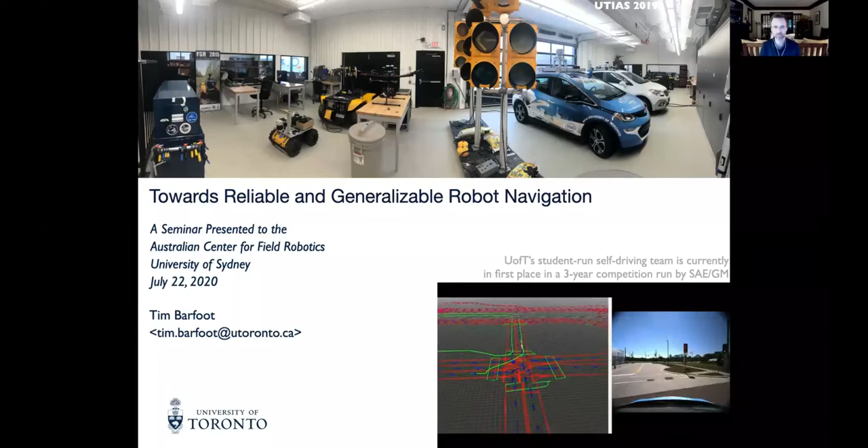Okay, so I'll jump right in. I won't talk about this video that's been on the first slide, but we do actually have an undergraduate self-driving car team. So this is all built by undergrads, and it's quite a fun project. So today I broke the talk into two parts. I'm going to spend some time talking about some past projects where we've been trying to build up reliable robot navigation solutions that can operate in the real world. I'll talk about this ongoing affair we have with a framework that we call visual teach and repeat. And I'll do a bit more of a deep dive on one aspect of what we've been dealing with in the last few years, which is dealing with appearance change, if you're navigating with cameras.

And in the second part of the talk, I will give you a bit more about what's going on at the bleeding edge of our lab in terms of some current projects. And this is where I'll start to talk about this push towards generalizable autonomy and the idea of a template for a navigation solution. And in particular, how can we build templates without expensive ground truth labeling for a lot of the data that we need to build up robot navigation solutions. Okay, so let's go into the first part of the talk.

And I'll just give you one slide on what I'm interested in, a nice overview of my interests. I've worked in state estimation, which I think of as perception, mapping, localization, tracking, as well as planning and control. And the size of these circles, I guess, is figurative for how much time I've spent on these different topics. A few highlights from the lab over the years. In planning, if you're a planning person, you may have heard of the Informed RRT* or the BIT* algorithms, which take RRT* and try to make it more efficient, in particular efficient enough to work in high dimensions, so freely downloadable code for those. We've also worked on some SLAM type problems.

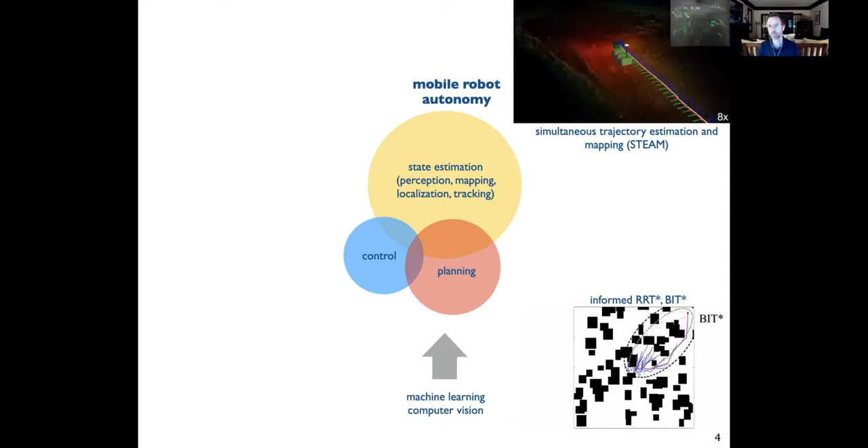In particular, we extended SLAM to a framework that we call STEAM, which goes from discrete robot poses to continuous functions of time for robot trajectories. And these tools can be quite useful in problems where you've got a sweeping while moving sensor. So for example, a lidar or a radar or a rolling shutter camera, where you can't really say that every datum from one of these sensors comes from the same robot pose.

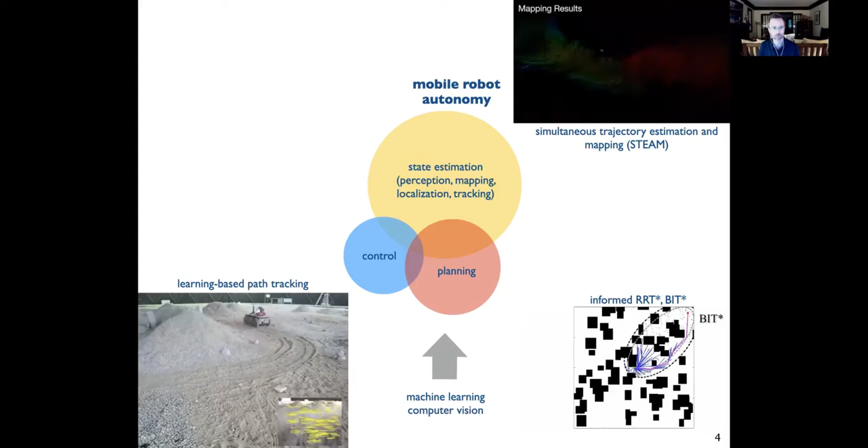We've done some work on control, in particular, combining learning with control. So we're seeing an example here of a robot that's trying to track a path, and it's trying to build a better model of itself by looking at its own path tracking errors as it repeats the same path over and over. And the idea is as it gets a better model of itself, it can actually try to drive the path faster and faster and more accurately.

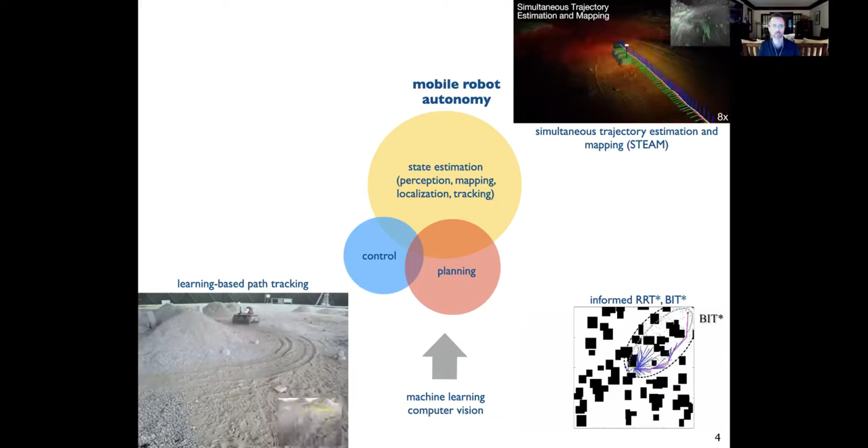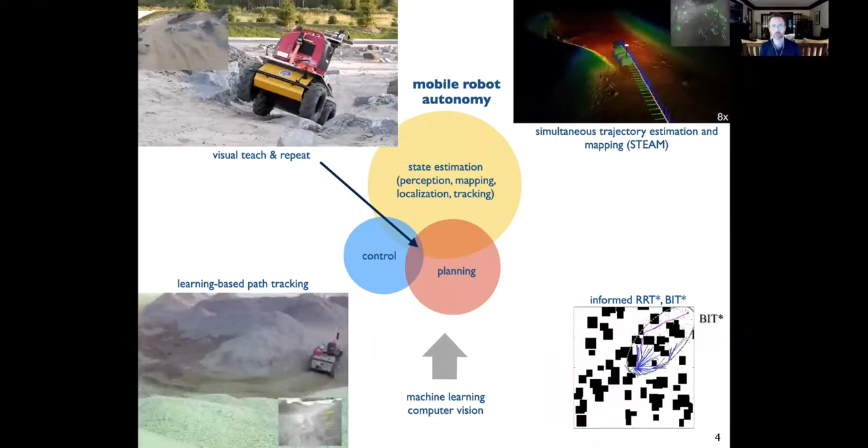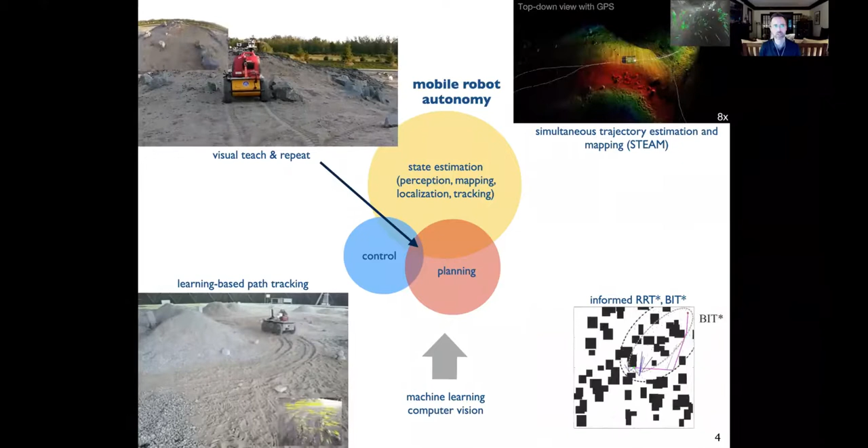And then what we'll mostly talk about today is one of the frameworks we've worked on to try to integrate all of these different component modules into an overall navigation solution, in particular this one that we call Visual Teach and Repeat. So I won't describe it because I've got a whole next slide that's going to talk about that, but I kind of think of that as not just a useful tool in and of itself for robot autonomy, but it's also kind of like a good petri dish for exploring different component algorithms, because we can plug them into this framework and see how they fare as part of a larger autonomy system.

Okay, so what is this Visual Teach and Repeat that I've mentioned a few times? So as I said, it's a full robot navigation framework that basically allows a robot to navigate, in this case, using only vision in any environment. So we don't assume any particular structure, like a self-driving car in terms of roads with traffic signs and lanes and these kinds of things. VT&R works with one laptop, one camera, a stereo camera, one training example of each path. So we actually get a human to drive the robot along each path that it's going to be repeating once as a training example. We don't use any GPS, we don't use IMUs, no DNNs, no global map, and no semantics. So it's very bare bones.

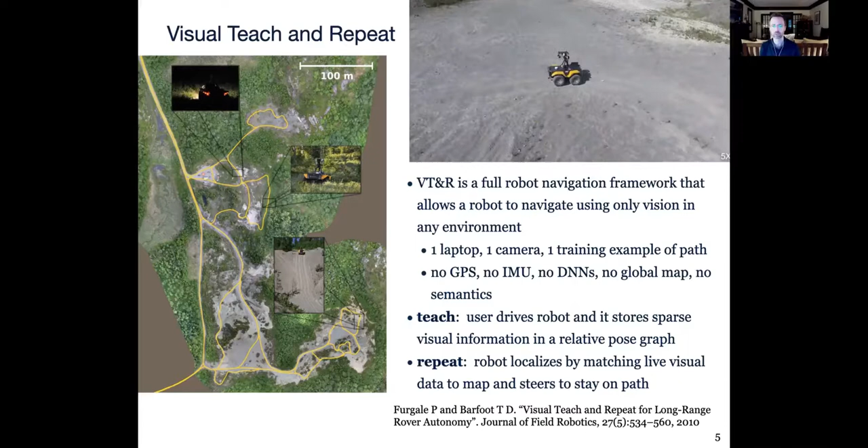And the general idea is that, as I said, a user will take a robot and drive it along a path, which we will build a map from a rich sensor, such as a camera, along this path. And we'll use this to then allow the robot to localize itself against that path to drive the path autonomously. And so you can see an example on the left side of the slide. I think you can see my mouse if I move it around. All of these yellow paths were demonstrated to the robot. In fact, this is an interconnected network of paths, 5 kilometers of paths that were taught to the robot. So one training example of each segment.

And then the idea would be to quickly show the robot all the places that it's able to drive and then have it autonomously drive on that network of paths essentially forever. That's sort of the overall goal. And you can imagine there are a lot of challenges around that. If you want to try to do it using vision, we can see even in the picture some examples of quite different lighting conditions that the robot might encounter. And it's only had the one training example of each path. So that's kind of what we've been working on for about 10 years.

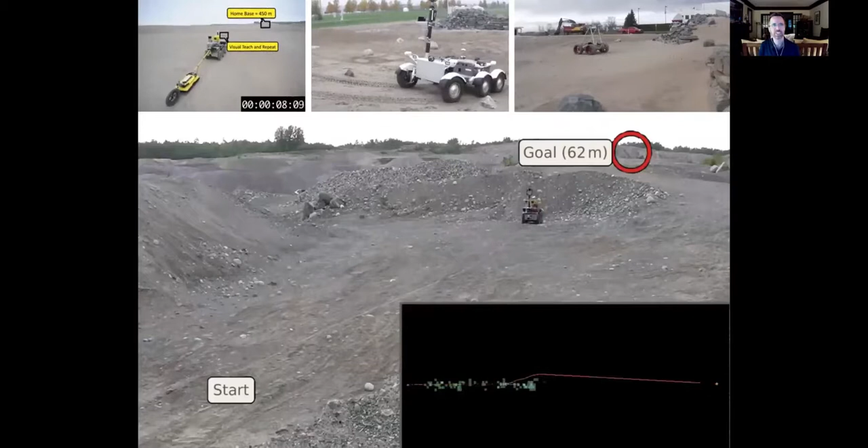Here are some older examples of VT&R in its infancy, I would say. On the top left, we've got a robot driving in a really barren environment using stereo up in the Arctic. In the middle, we've got some code that was deployed to a $11 million rover prototype at the Canadian Space Agency. Again, on the top right, another rover at the Canadian Space Agency that happened to be driving as Hurricane Sandy blew through. So it was sort of emulating a dust storm on Mars and changing the environment visually. And we were able to continue to drive.

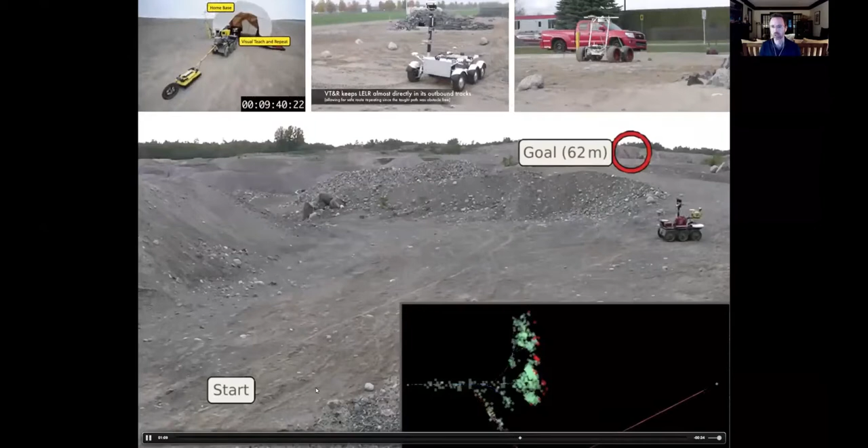And then in the bottom, we've got something a little bit more than teach and repeat. Here we've got a robot that's actually trying to teach itself a path from a start to a goal. And the idea is it's kind of like an embodiment of a tree search. So the robot is branching off this tree that it's building up, and every time it finds a dead end, it uses our visual teach and repeat algorithm to backtrack along the tree towards the root and then branches off at a different place.

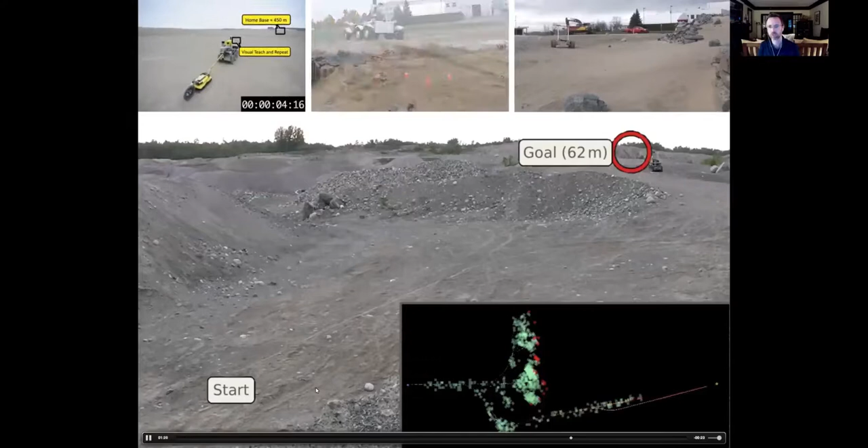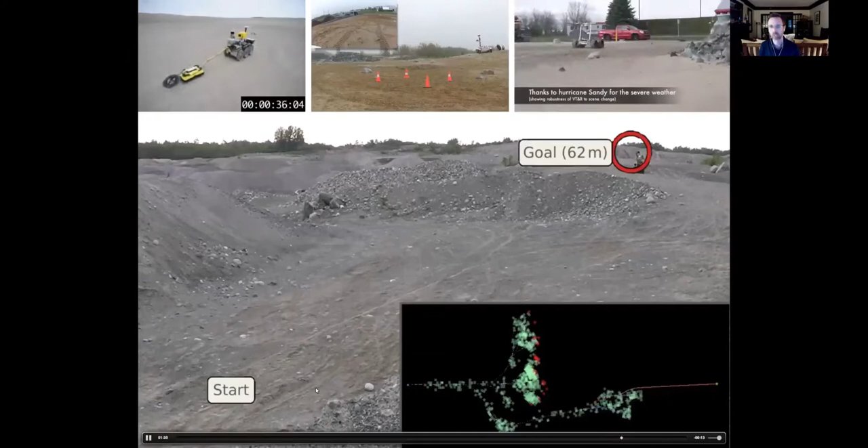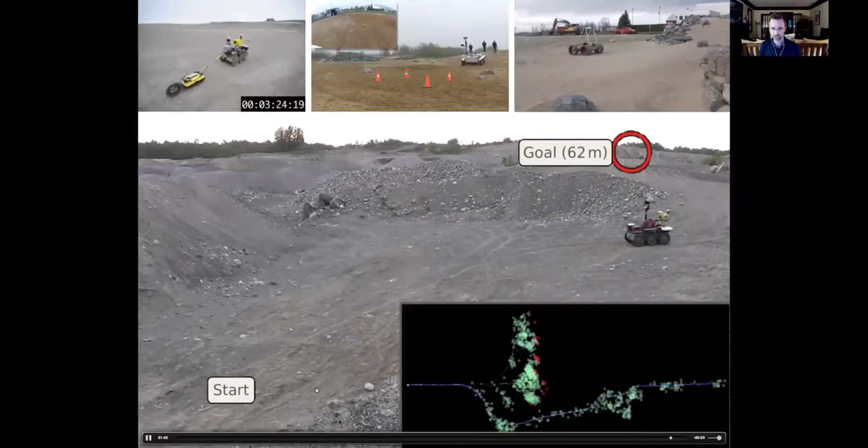And eventually it can discover a path from the start to the goal without knowing a map of this terrain in advance. And once it's established that, it can actually just autonomously drive back and forth between that start and that goal as many times as it likes. So there are some applications in planetary exploration that could make use of that.

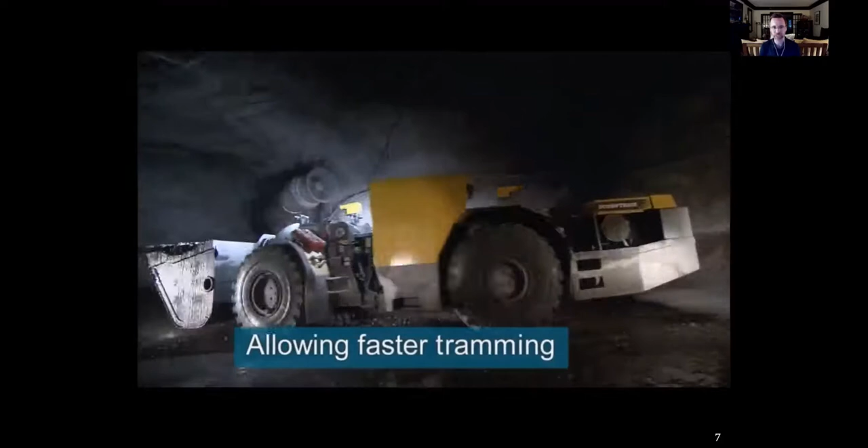We've also deployed a visual teach and repeat algorithm, actually even before all these vision videos that I just showed you, where we're using a lidar for an underground mine truck. I know a lot of the early underground mining started at U Sydney, so this is my shout out to all of that work that we built on.

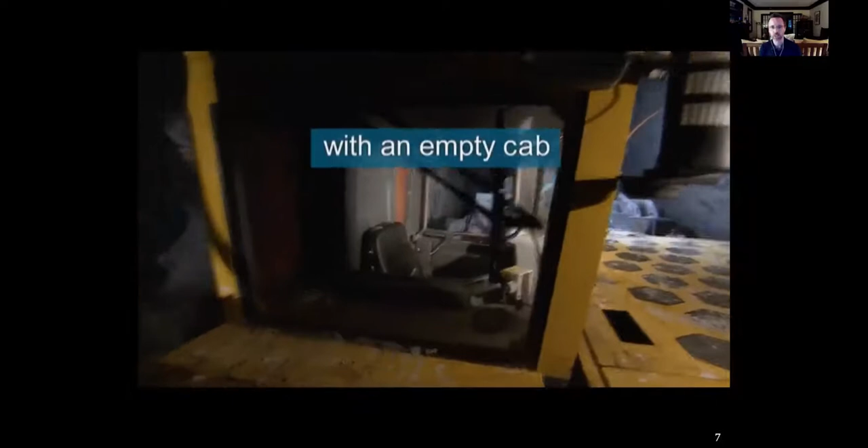This is a 14-ton scoop tram driving in a mine autonomously. There's nobody in the cab, and it's using this visual teach and repeat to navigate up and down the hallways. So again, an operator would show the robot the paths that it's allowed to drive, and then it can operate on those autonomously.

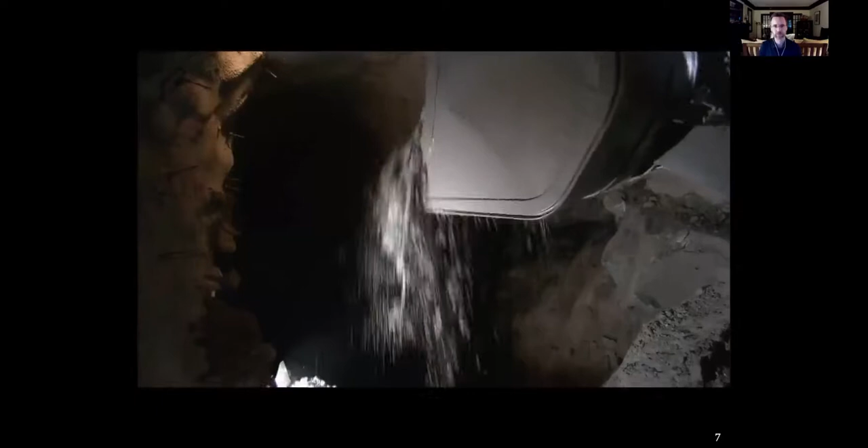More recently, we've been deploying this framework onto unmanned aerial vehicles. We're collaborating with a company that does delivery in the far north of Canada to remote Inuit communities. And the idea is that we would like a fallback if GPS were to fail.

So the idea is we're flying under GPS control, and eventually we might experience something like a GPS failure, but because we've built up a visual map on our outbound pass, we can then use that to localize and backtrack towards the start without using GPS. And so here you're starting to see some of the inner workings of the algorithm, some features that we're tracking, and we're using those to build maps.

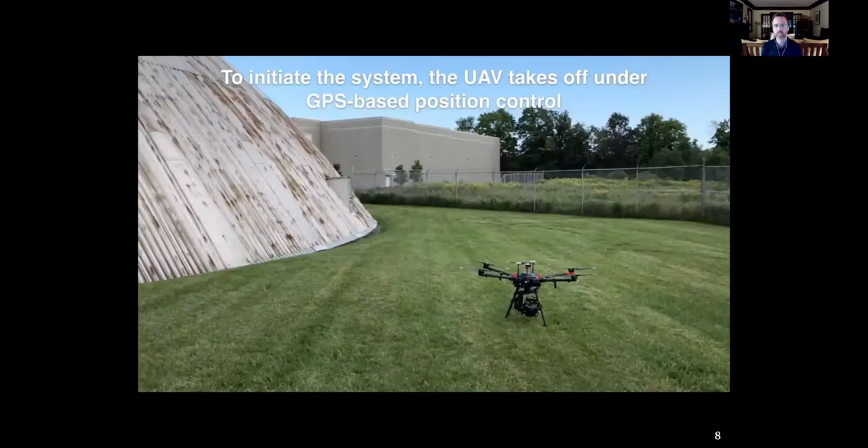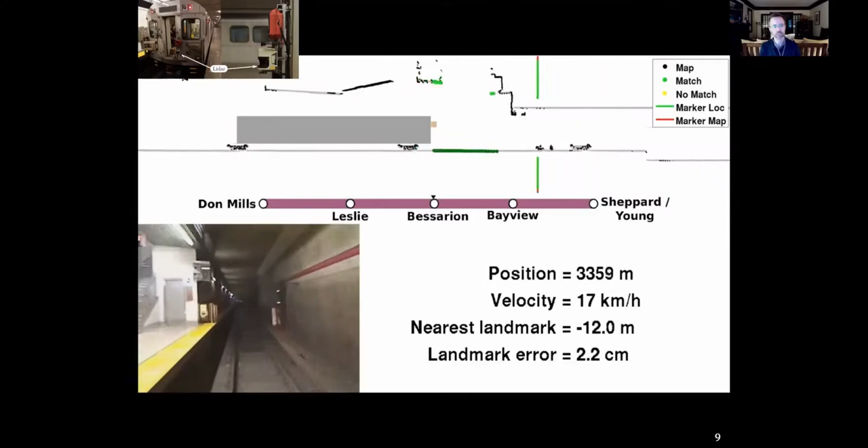And then one last example of where we've used some of the underlying localization technology of teach and repeat. We've actually been working with the local transit commission to see if we can improve on the positioning of transit trains in the Toronto transit network. So it turns out, I didn't know this, but most trains are actually positioned using RFID tags, which means the precision of the localization of the train is like between 10 and 100 meters, which is not particularly good.

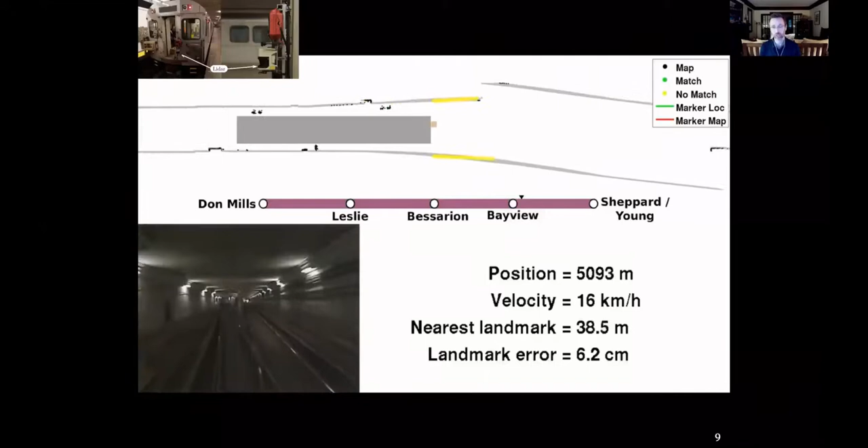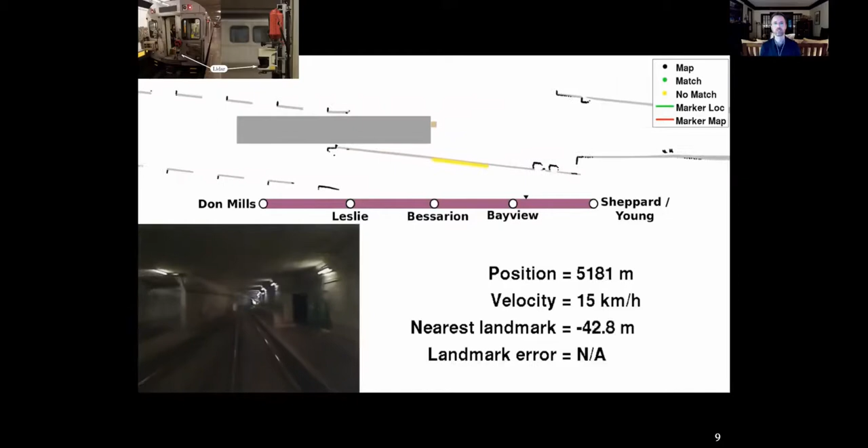And it turns out if you could actually have much more precise localization, you could pack more trains onto the same tracks because you can know where they are more precisely. In fact, if you could know where you are very precisely, to a few meters or 10 centimeters, you could put twice as many trains on the Toronto TTC tracks and thereby double the capacity without changing the tracks. So this is actually showing that we can localize using similar infrastructure that we would use in teach and repeat down to a handful of centimeters using just a planar SICK laser rangefinder.

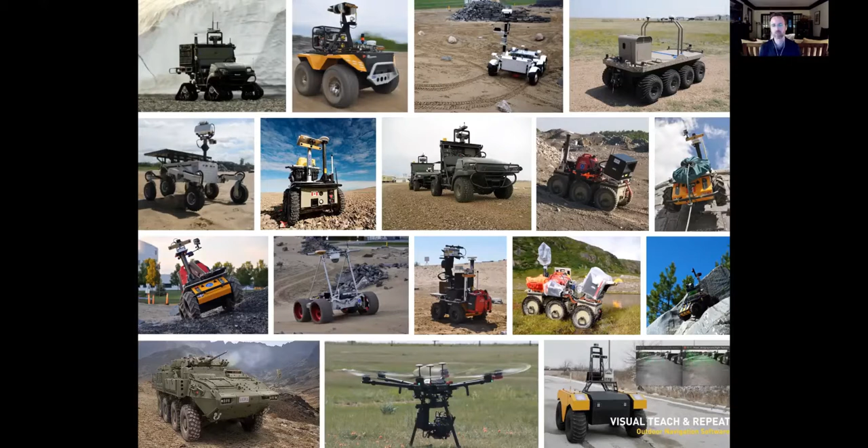So we've been working on this framework, visual teach and repeat, for, as I said, about 10 years. Deployed it on lots of different robots, had partners deploy our code on different robots, everything from these unmanned aerial vehicles to the tank-like vehicle that you see in the bottom left of the screen. Learned a lot about different things. And in particular, now we've robustified the code enough that in the bottom right, you can actually buy a license of our teach and repeat software from ClearPath Robotics. So they'll deliver you a robot with our visual teach and repeat software on it.

Hey, Tim, quick question from Viorella. She's asking whether the existence of a path that is wheel tracks is a requirement for this to work. Like, do we need to be able to see the tracks? We do not need to be able to see the tracks. We just need to have a textured environment where we can have some interesting landmarks to track.

Okay. I also just wanted to ask, with this single shot demonstration, are you then updating the model in subsequent repeats so that you're learning how this is changing through time? I think I've seen you show this in summer, winter. Presumably there's some learning that sits on top of all that. It's coming up. You're anticipating the talk. Sorry. It's coming up. Very soon I'll get to it, actually.

Okay, I'll keep going. So as I said, visual teach and repeat is a tool in and of itself, but it's also a bit of a petri dish for letting us try out different things. We've played with everything from learning to improve path tracking, I showed a video for that, learning to assess terrain, route planning through a network of paths under uncertainty.

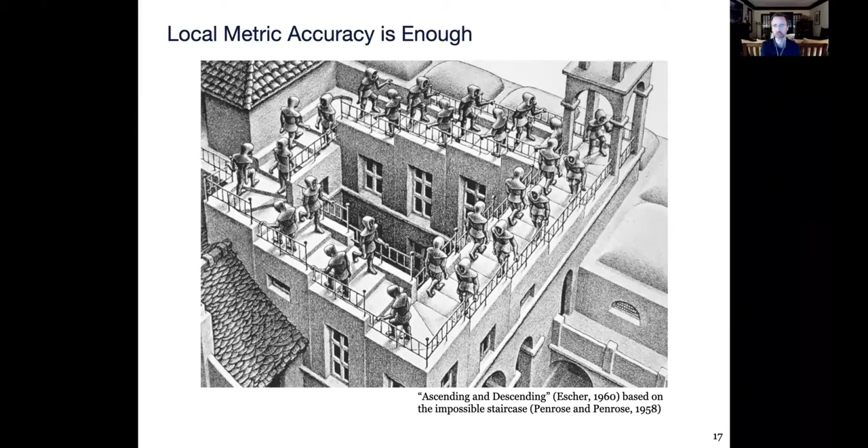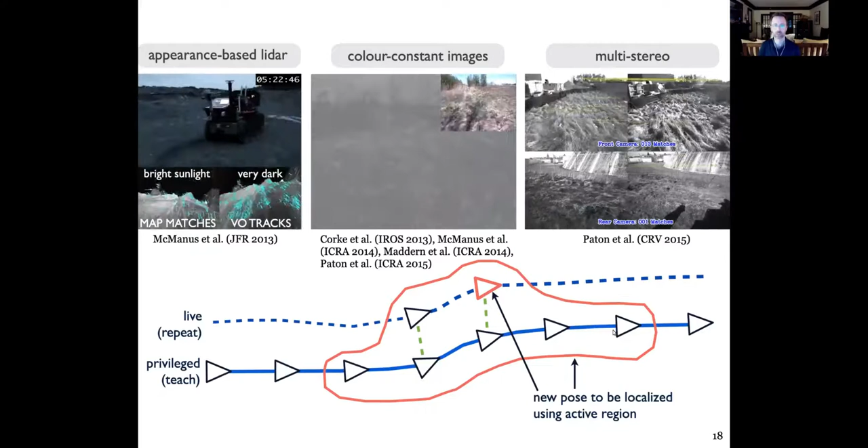So to start to deal with appearance change now that we know sort of how the map works, we tried a number of things in the past. So if we're always trying to localize the live image, this red triangle, back to the map, if we're only ever using this one map that was built under one particular lighting condition, for example, you're going to run into some problems as the light starts to change. And so we've tried a couple of things over the years that didn't work so well, I'm going to say.

So the first thing you could try to do is change the sensor, right? So we did a bunch of work where instead of using cameras, we were using this fancy lidar that could produce intensity images way back like 10 years ago. And then we tried just tracking features in these intensity images instead of in regular images. And those images kind of look the same whether you're in sunlight or dark. And that worked okay, but it required like a $100,000 lidar sensor. So that isn't really something that's a good long-term solution.

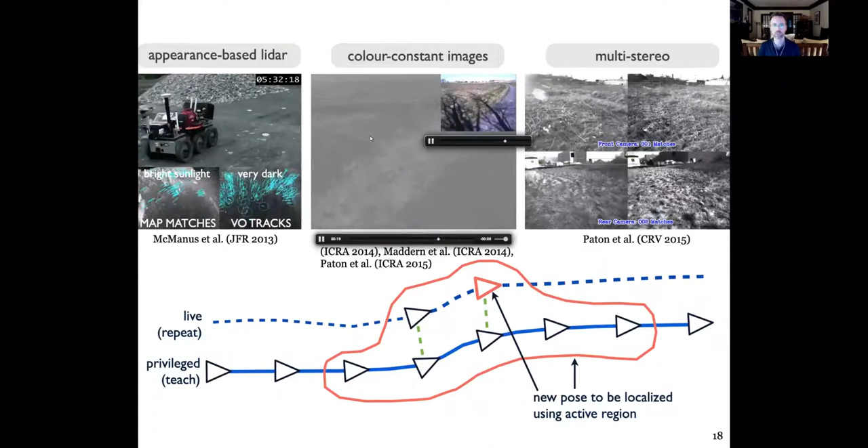We also played around with this idea of color constancy and taking these transforms on the red, green, and blue channels that image in different wavelengths and combining them to sort of eliminate shadows. So you can see here some shadows in the regular red, green, blue image, and then we've eliminated those in this color constant image that we can calculate. And it turns out that's actually pretty good. In daylight hours, that's a very cheap way of doing something that lets you continue to localize pretty much through all daylight hours, but not good enough to localize at night, for example.

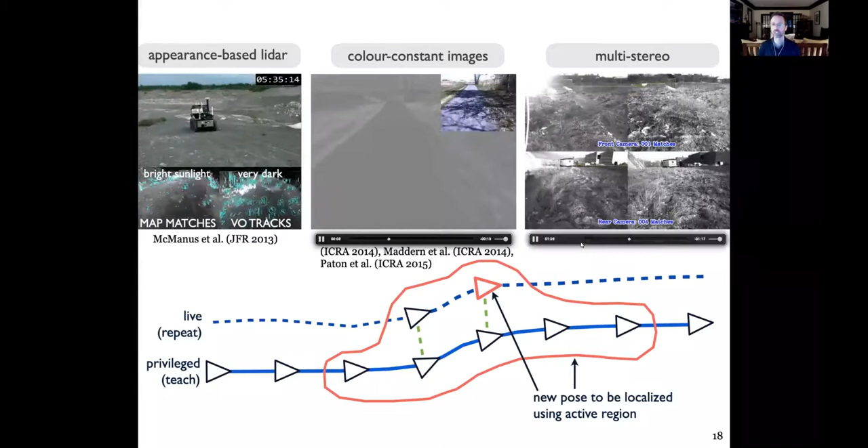Even dirty tricks like putting cameras pointing in different directions so that you can sort of guarantee that not all of your cameras are pointing at the sun. So I would say these are all interesting things that we tried, and they're all kind of band-aids on the problem. And really, none of these allows us to sort of teach a path in the sunlight and then track it in the dark unless you use a very expensive sensor.

Got to move to Australia, Tim. It'd be easier.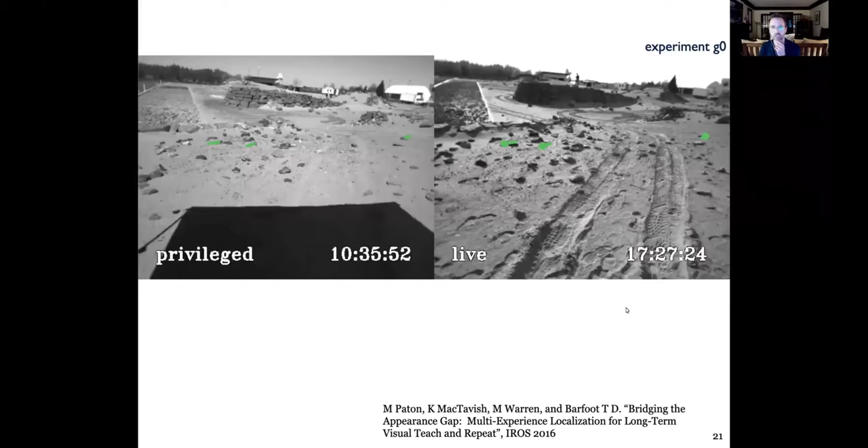The shadowing is quite different, and we're getting very few matches, indicated by these green blobs in the image, just SURF features between these. And as we start to drive around, we can see there's places where we actually get no matches. Sometimes we get matches, but quite often we're not getting any matches because the lighting has just changed too much.

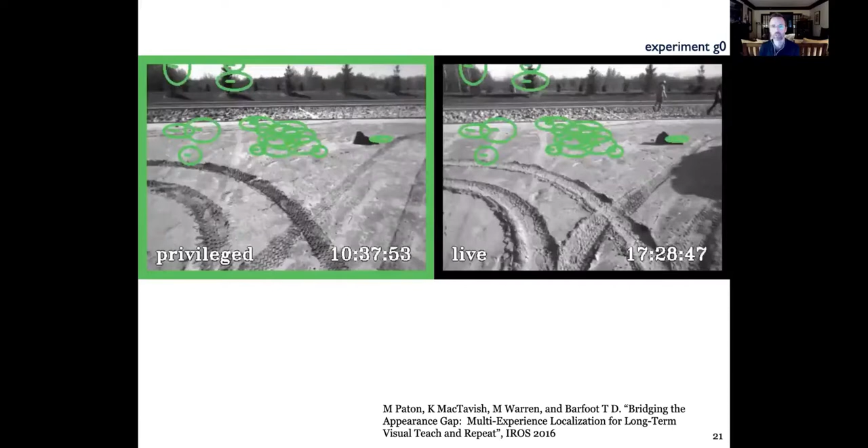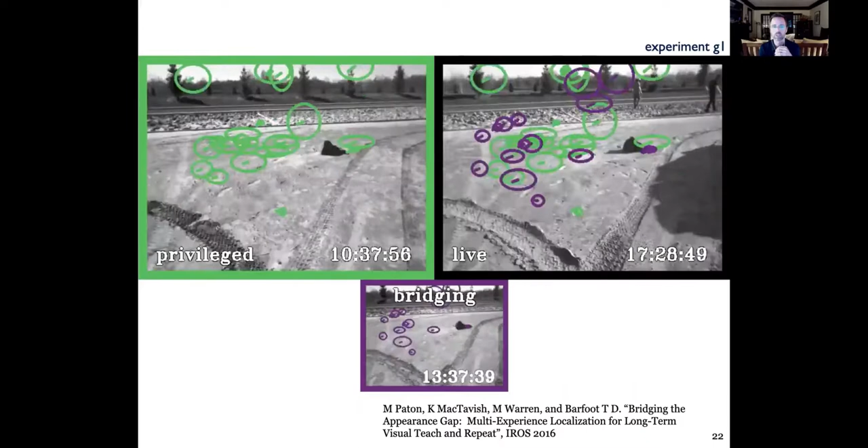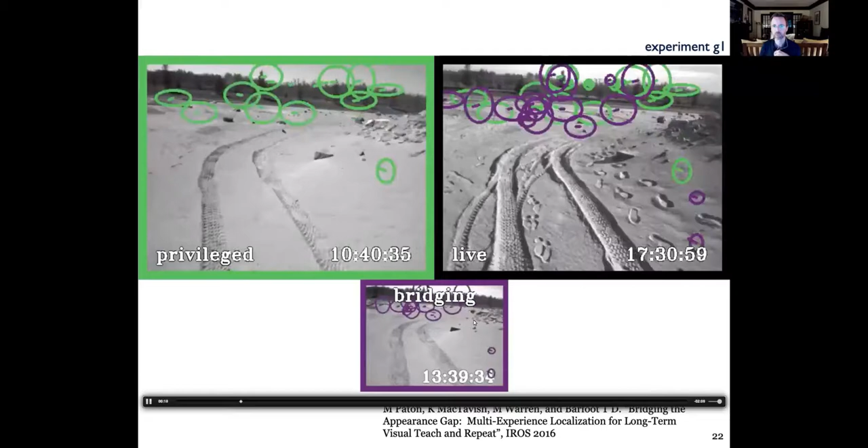And so the solution is maybe we could actually not wait 7 hours to drive. Maybe we could have an intermediate experience that's sort of halfway between these two in time, which is the one that I've added at the bottom. And so now I can match the live image, not just against the original image, but also through this, what we're calling bridging image, which is halfway in time. And we can see now that the different colors in the top right are features that we're matching back to each of these two different previous experiences of driving the path.

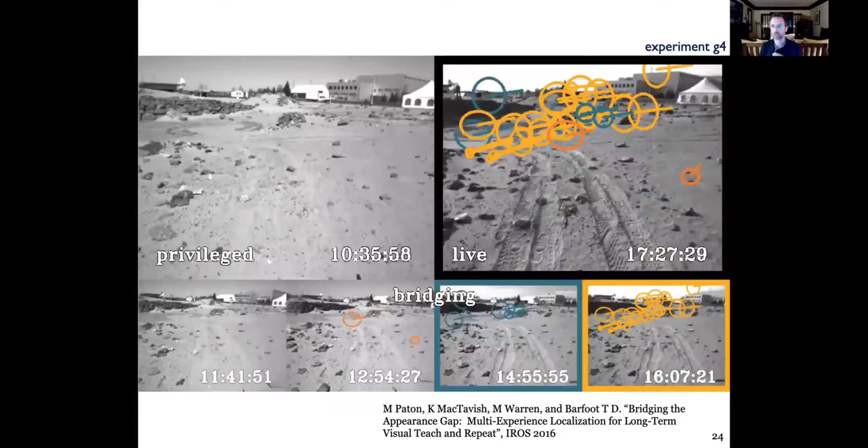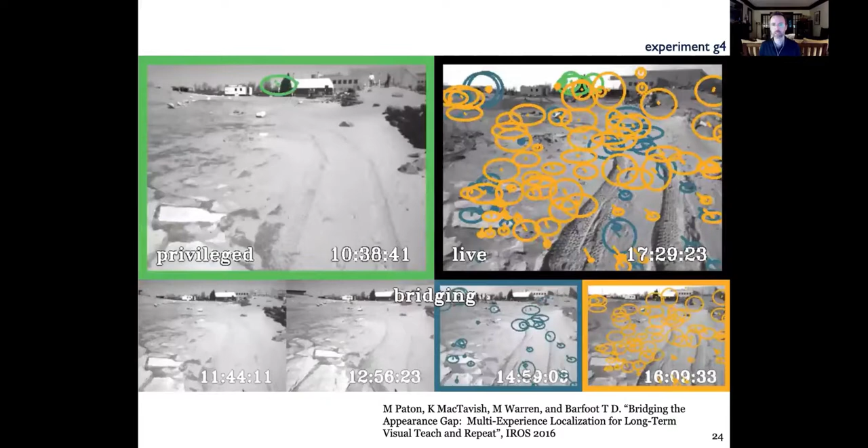And if one bridging experience is good, surely 2 would be better. And if 2 is good, 4 would be even better. And if 4 is good, 1,000 and whatever would be even better than that. And so the idea is every time the robot drives the path, it's getting a new visual experience of what that path looks like, and we can add that into our database, and then we can use every previous experience of driving the path to try to localize the robot. At least that's the idea.

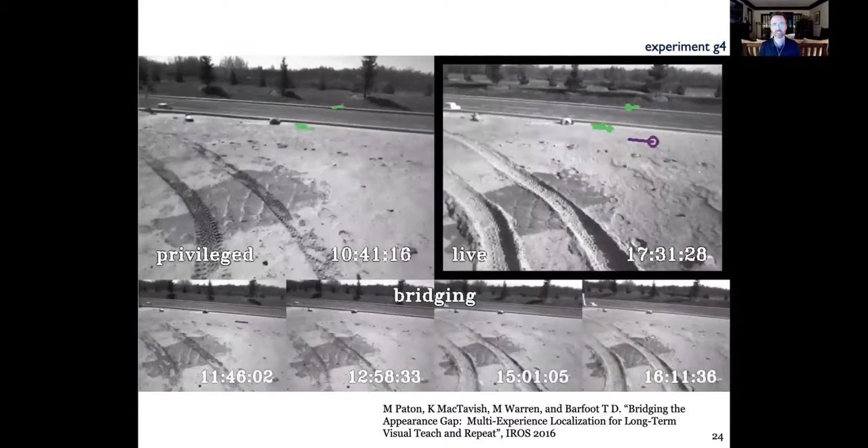Of course, if you're listening carefully, you'll realize that how on earth does this scale, right? We might be driving the same path thousands of times. Of course, we're gonna have to start pruning things off. And actually, even before pruning, we could just be selective in choosing which things we want to localize against.

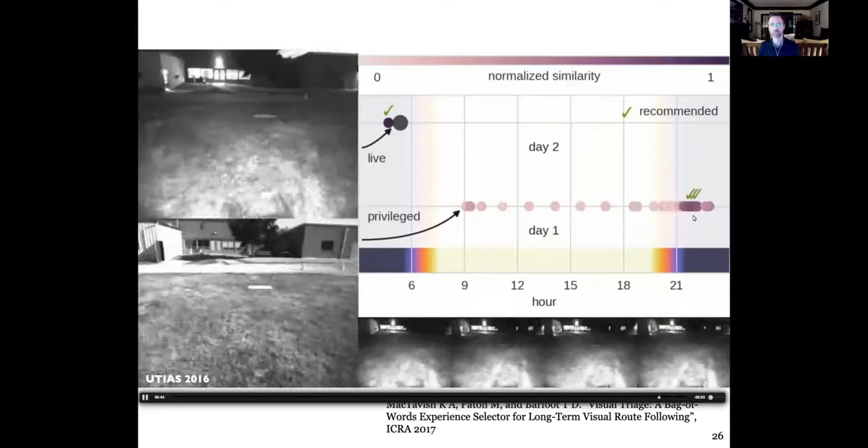So this is a video from a 24-hour experiment where we had about 30 or 40 traverses of the same path. And we actually built a sort of recommender system that would take the live image, and it just used something like Visual Bag of Words to quickly compare the live image back to the previous experiences that we'd stored at all different times of the day. And these little green check marks are the recommended experience. And then we just metrically localize against those rather than all of the previous experiences. So we're kind of triaging and just selecting a subset of the previous experiences to localize against.

And so that's sort of my summary of where we were a couple of years ago. If you put all of that together, you have a system that looks like this video. So this is a 2-week experiment we did in Sudbury, just about 4 hours north of where I live in Toronto. I actually showed you the map of this experiment at the beginning of the talk on the first slide for visual teach and repeat. The robot is now autonomously traversing some of these paths. So we actually did about 200 kilometers of autonomous driving on this 5-kilometer network over a 2-week period.

And you can see actually these ruts in the ground, those weren't there when we got there, right? Those are there because we've been repeating the same paths over and over so many times that it's literally etched itself into the earth. And you can kind of see the accuracy with which we're able to follow these paths. And I will say, the lighting and the weather changed significantly over that 2-week period. So we were doing experiments even in the dark with headlights.

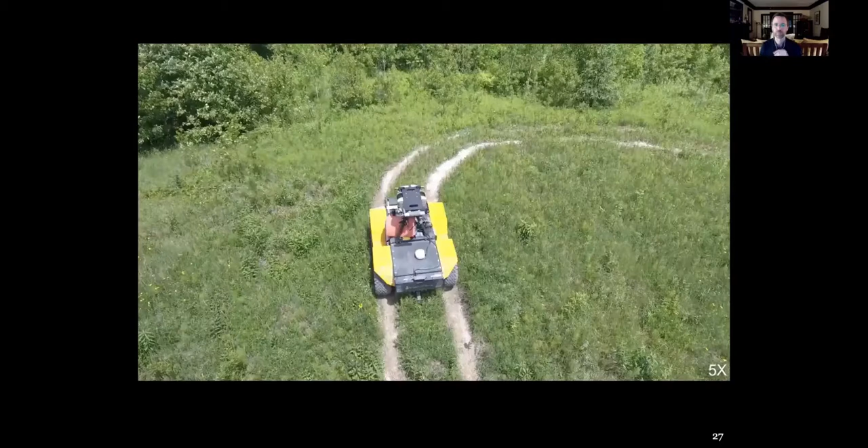The Achilles heel, of course, is you can't let the appearance change too much before you redrive. Otherwise, there's going to be a gap in what the robot is able to match against. But this is one solution to being able to sort of span all the ways that the world can look, as my friend Paul Newman often says. And really, that's probably good enough for at least medium-term autonomy.

Okay, so what have we been doing since this work? All the videos that I showed you up to this point were essentially working on SURF features for the landmarks. And of course, the technology has moved on in these past 10 years. One of the things we tried before trying deep learning was something called GRIEF. So you may have heard of BRIEF features, which instead of SURF, which is using a histogram of oriented gradients, BRIEF features use these little patches with these binary comparisons.

So this white patch in the middle is sort of a blown up version of one of these patches, and these little black lines are the binary comparisons that it does in the patch. So the descriptor for this patch is essentially saying whether one end of this binary comparison is brighter than the other end. And so BRIEF sort of randomly picks these binary comparison lines within a patch. And then what we looked at was an algorithm called GRIEF. So GRIEF is actually a learning-based version of this algorithm.

And the idea is you can kind of think of this collection of binary comparisons as like a population. And we run something like a genetic algorithm, a survival of the fittest algorithm, to sort of evolve this pattern of binary comparisons over time. And we get labels for free because we're localizing as we drive along. And so we can kind of say which binary comparisons are consistent with the matches that we're actually getting and which ones are not.

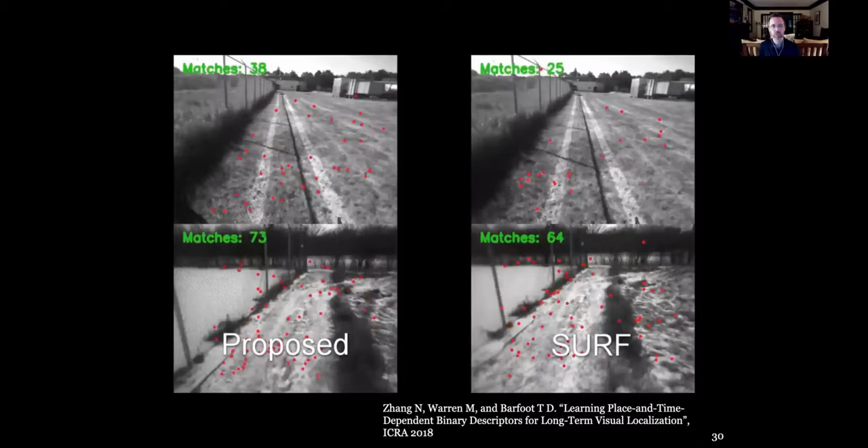Compared to SURF, we ended up getting, in sort of the corner cases, about 2 times as many usable matches, but it's still a bit of a band-aid. It's not going to allow us to match daytime to nighttime, for example. But it was something that was useful, and it was pretty low cost to implement it.

Another thing we've been looking at is getting away from features altogether and trying to use full image data. So this is an example from UAV navigation, where we were trying to directly match UAV images to rendered images from Google Earth. And this is a little bit of a similar problem to trying to match across large appearance change that we saw on the ground vehicle.

So in this case, we're actually using mutual information to try to align these images. That's been demonstrated in other contexts for even matching different sensing modalities. So we thought it would be a good thing for dealing with appearance change. And so we implemented, actually this is not running live on the UAV, but we implemented on data sets a new algorithm for localizing against these Google Earth rendered images.

So in this case, we don't even have to actually fly the flight path in order to get the teach pass. We can just do it virtually in Google Earth and then have the robot try to repeat that same path. And we kind of showed that we were able to robustly match across even quite different lighting conditions back to the same Google Earth rendered images, which is what's coming up in the video right now.

So here's an example, same place at different times of the day. These are images from the UAV, and we can see the shadowing is quite different, which presents quite a bit of a challenge. And so now we're localizing all those different lighting conditions back to the same Google Earth imagery and trying to show that we can match ground truth, which we gathered with a GPS INS system. You can kind of see just qualitatively that across all these different lighting conditions, our localization remains pretty robust.

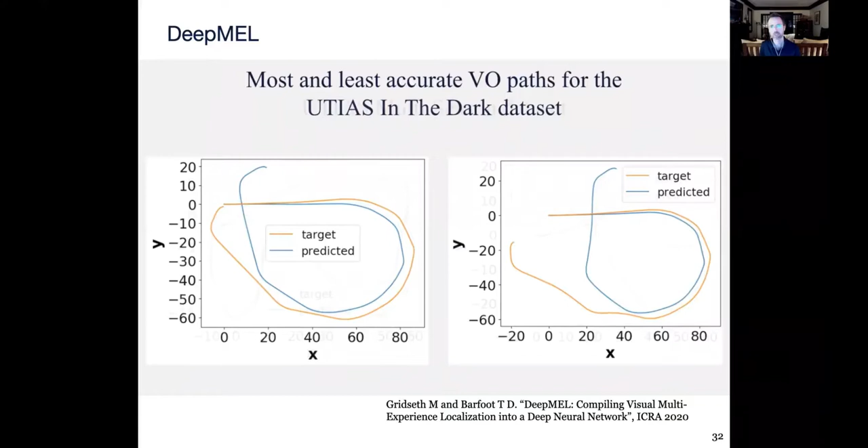And I'll just show you some examples of that. So we trained two different networks to do VO and to do localization. And we're kind of seeing here the results for VO, which is sort of like not even state of the art, but good enough for teach and repeat. And now there's going to be a video that shows sort of the results of trying to localize directly with this deep neural network. So this is at test time.

We've got the teach image in the middle column and the repeat image on the left column. So matching snow to grass or green grass to brown grass. And on the right, we're sort of seeing an alpha blend of those two at the estimated pose coming into the network. And we can kind of see when these images line up well through the two images that are being blended, it means our localization is working well. And when it looks kind of weird, it means our localization is a bit off.

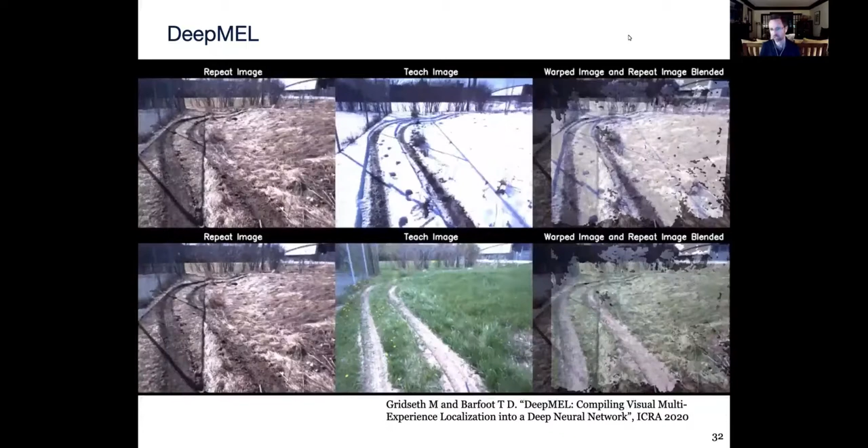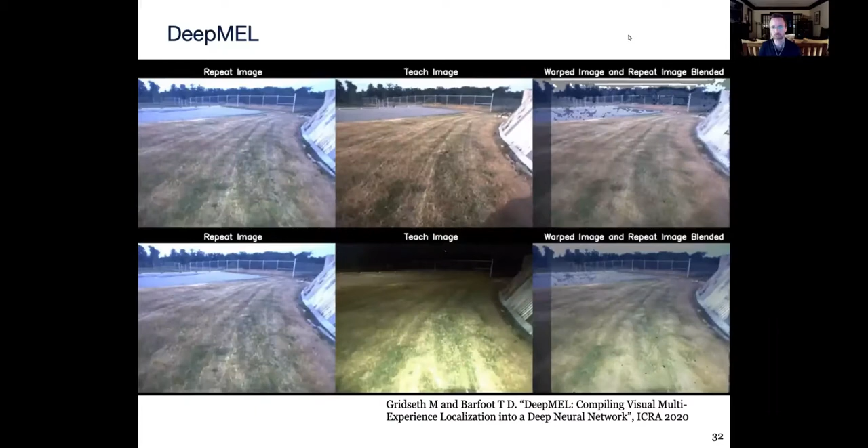We're not quite in the ballpark of localization being good enough to actually run this live on the robot, but we're close enough that I think that the idea has promise. Probably we need some more training data. The challenge here is that while we're able to do this reasonably well on the same path that we localized on, we cannot take that network so far and then use it to localize on a totally different path. And so this is just a way of compiling all of the existing experiences into a network for that particular path that we're going to drive, but it doesn't yet generalize.

Okay, how am I doing on time? Really good, Tim. We've got another, well, it's 10:36, so you've got until the hour. So please do take your time and run through it. If we run over a few minutes, it's not the end of the world. Sounds good. Okay, just wanted to do a time check.

So that's sort of like a good summary of a bunch of stuff that we've done over the last 10 years and even just the last couple of years. And now I want to talk about some of our bleeding edge current projects. So what I'm really getting interested in these days is this idea of, all these systems that I've shown you are, many graduate students working on these for many months or sometimes years to get to the level of robustness that we really want to see. And that's a lot of effort.

And so what I've been interested in lately is, could we start to build more of a generalizable solution where we could just build a template for something like a teach and repeat algorithm and then drive the robot around, get a bunch of input-output data, and then fill in the details of that template and see how that goes. So I'm going to talk a little bit about that now.

And I guess my philosophical slide of the talk is that this is my state of affairs for robotics, I would say. There's some trade-off between the difficulty of the task that we're trying to solve and the generality of the solution. And of course, we would all like to be here where this green circle is. And I think a lot of the time, at least in field robotics, we sort of compromise and head more along this direction where we want to solve the hard problem, but we often overfit to that

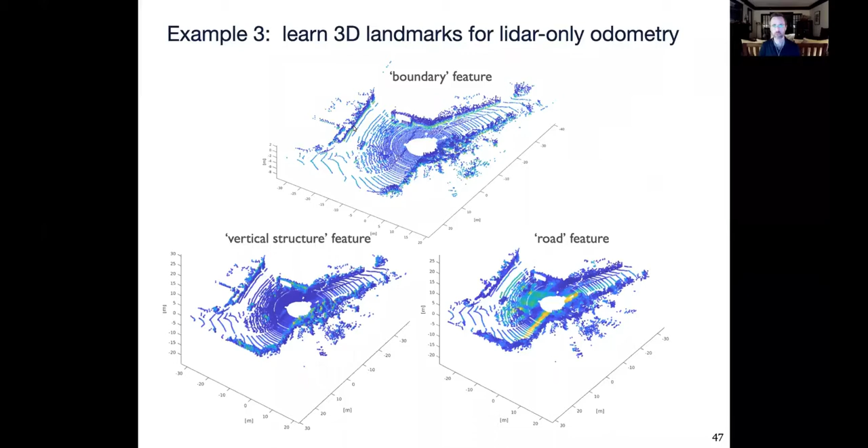Okay, so I think that was actually my last slide. I'll just put this video up to sort of show what we'd hope to be able to do. That's as far as we've got on this generalizable problem. Eventually, what we hope to be able to do is just drive around and then output an algorithm that does something as robust as this without having to spend 2 years of engineering all of the software and testing it for so long. So not there yet, but that's sort of where we're going.

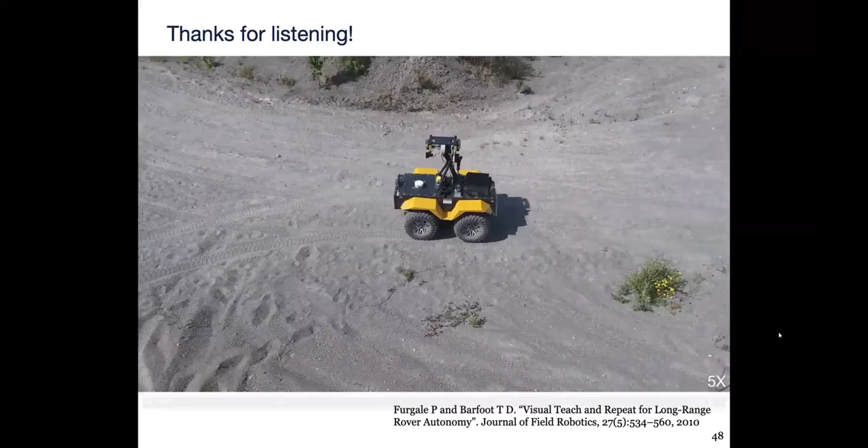When you were talking about the additional views when you're running multiple tracks, have you done any work on sim-to-real, synthesizing additional tracks? Can you hallucinate what things look like under different conditions, modeling lighting changes and things like that, and use that to provide additional simulated views of what the robot thinks it should look like, that it could check against if it was repeating?

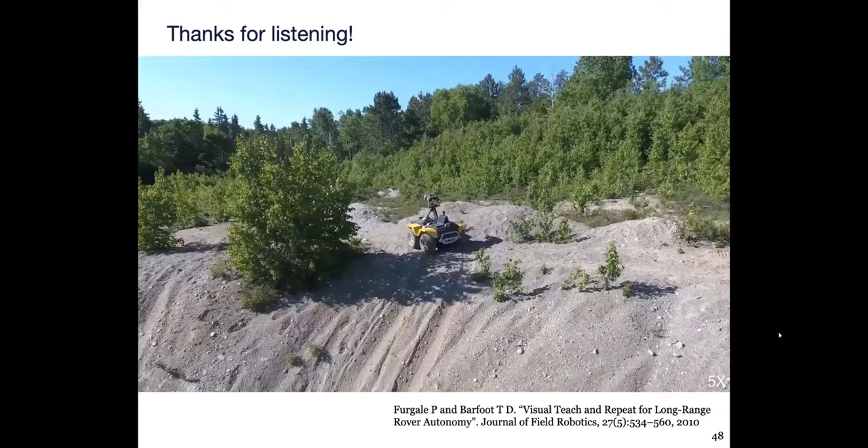Yeah, so I have not done that, but others in my department have. Jonathan Kelly's recent PhD grad, Lee Clement, put out this paper called How to Train a CAT, and CAT stands for Canonical Appearance Transform. He didn't hallucinate different views, but tried to learn a way to make all of the views look like some canonical experience, sort of the inverse of what you just said. So that was one thing that's been tried.

We haven't tried synthesizing different views in the classical multi-experience framework, but we have when training networks to directly match things across a wide variety of conditions, without a lot of success so far. We've tried cheap ways, changing the brightness of images and putting boxes on images to introduce visual dropout, but not enough success that we've published anything on that yet.

My other question is, if you're doing this predict-ahead work and the stuff you talked about at the end, does that feed into any kind of exploration or active learning, where you start to say, where should I go to improve my model and find new trajectories? Are you thinking along those lines, deciding where to look? We have not been thinking along those lines yet, but I know exactly what you're asking.

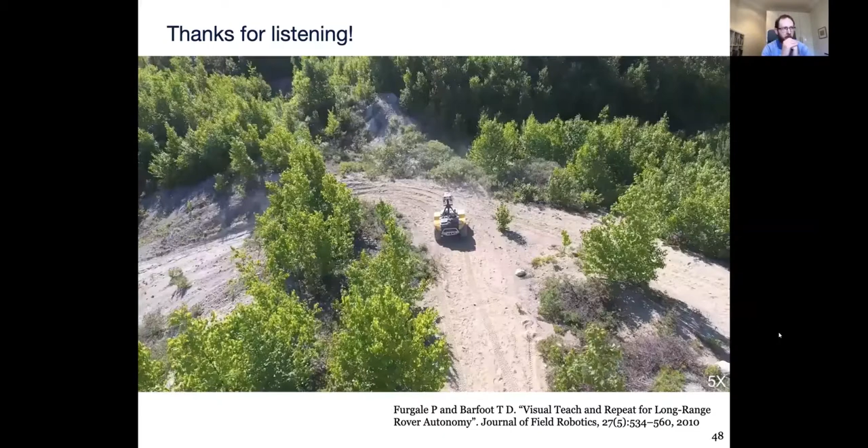If each step in the EM alternation is some kind of neural network fitting, how does that work? How are you deciding when to switch from E to M, and how you're deciding when to terminate the EM process? Yeah, those are all good questions.

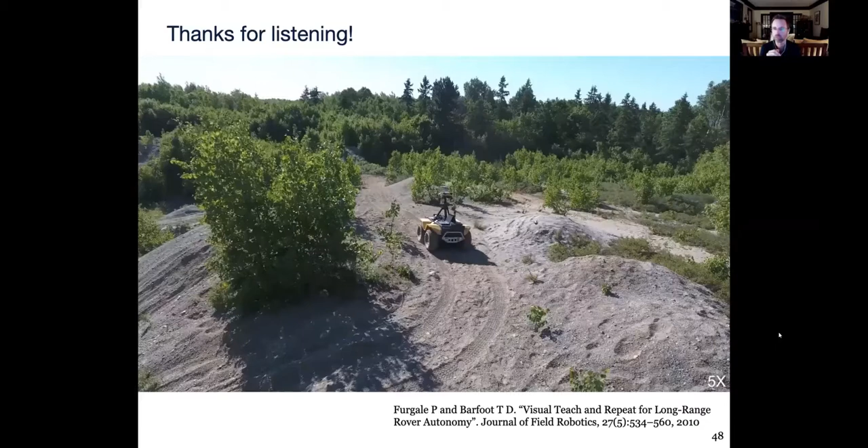I don't have definitive answers, so I should say that I guess we're doing something more like generalized EM, meaning we don't fully minimize the M step, right? So we just have to go a little bit better on each M step. And so what we've been playing around with is, if it's a neural network we're training on the M step, we do a few iterations of stochastic gradient descent to try to improve the model parameters. And then we can go back and do an E step, and then do some more stochastic gradient descent.

And we played around with different alternating algorithms, I guess. I don't think there's a definitive one that works the best on every problem, though.

Yeah, and I guess a second question is that generally EM, if it works, will learn a valid state space for prediction of the system, and there's no guarantees what kind of state representation it will converge to, but are you finding that it learns interesting or useful state representations, or is it just a huge pile of states that you can't really interpret? Not sure I totally understand what you're asking there.

So I guess another way to put it is it's the representation learning question. So in the context of linear systems, what you will learn is a state space which is an arbitrary non-singular transformation. Sure, the state space representation for a given transfer function is not unique, right? Exactly. And for nonlinear systems, it's also not unique, but under arbitrary invertible nonlinear transformations.